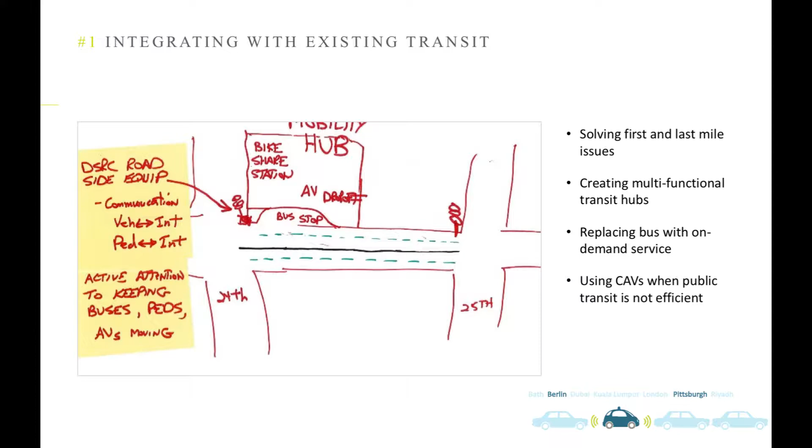And so they did see the opportunity of autonomous vehicles, and we've heard that this morning already, to have a first mile, last mile connection, but only if it is done in a way that the integration is so seamless that you're not really feeling like you're doing a change. Because if you start to feel that there is a change between getting out of your car into public transit and you have to have a new ticket or anything like that, you will feel it is an inconvenience and you stay in the car.

So it was really about how to think that, and in that context, the idea of mobility hubs came up where you could also pick up your Amazon package on the way. Why do we all think that we need to have the Amazon package delivered at home? If it's that convenient on your route to somewhere or from somewhere, it might be a much more efficient way to get you the package delivered.

And then it was recognized that CAVs, in whatever form, and I think Anthony's presentation made it very clear that there are many different forms of these vehicles, can replace public transit at times and in locations where it might not be efficient. So nighttime or in the outskirts of the cities.

The second idea that came up often was a more dynamic way of using the space, because often today the street is designated to the car, but if it doesn't have heavy tidal flow, it's still designated to the car. But does the technology of connected vehicles allow us to think that there might be times, in the afternoon where it's not really used by cars, can we then give it back to kids playing on the street? I think a lot of participants were excited about this technology and started thinking about how to dynamically allocate spaces to different users, from retail to pedestrians to different types of transit.

Then, with the hopes that governments really can regulate these things and can overcome the political hurdles, the financial hurdles, people really got excited about thinking about street hierarchies where you maybe have more vehicles, where you have less, and really started thinking about what you could do with the street. It was really bringing up the need for different types of storm management, removing the curb, using the public space and the street as a community asset.

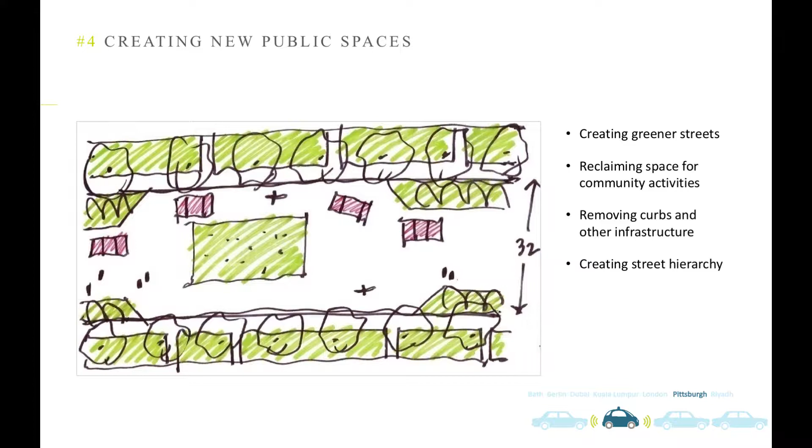And then the last two ideas are really about how to manage these changes, and two things that came up all the time were pick up and drop off. You can start seeing that with Uber and the ride services coming into our cities, there's really a need to rethink pick up and drop off. And even though we had a lot of urban designers at these workshops, I don't think anyone really came up with a solution that was satisfying to the participants.

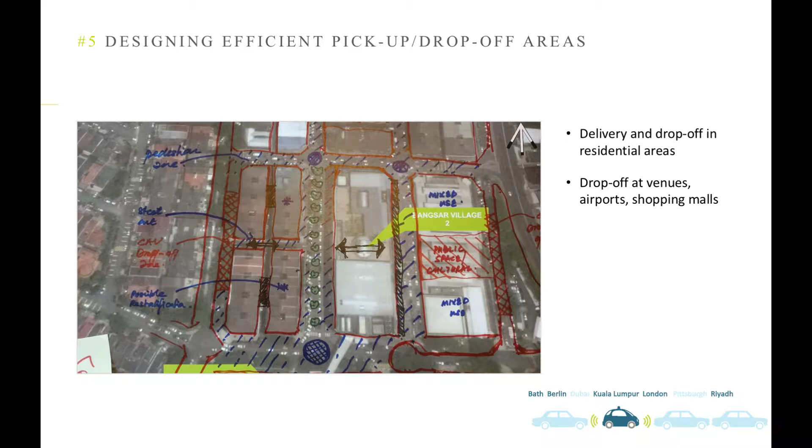So there was a lot of: instead of one lane, you have several lanes, and you have these stops, and people can come and figure out which number lane they have to get their car from. But I think there wasn't really a solution for dealing with the high capacity issue that we're expecting. And then there was also delivering your package at the home.

And as I said before, the idea came up of having a hub, potentially a neighborhood post office where you're actually going and picking it up. Canada already has that for picking up your mail; it isn't delivered to your home anymore. But also using curbside parking, maybe getting rid of curbside parking if you really don't need as much parking anymore. And then the question of parking was also heavily discussed in these workshops.

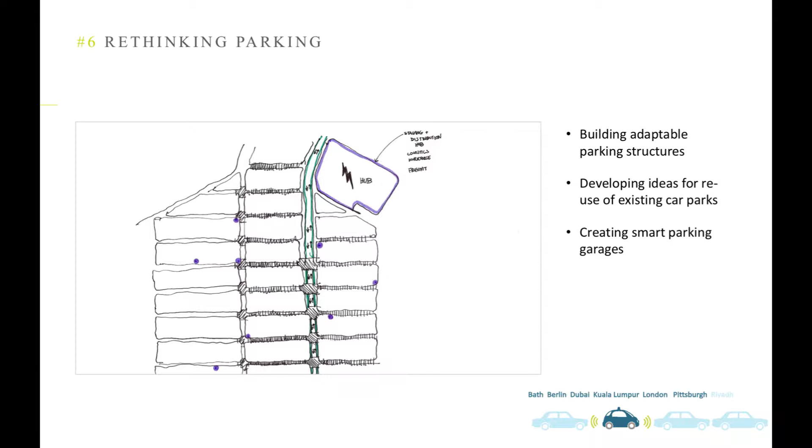From the question of, do you have the parking in the city, on high value land? You might need some parking there, because otherwise you just have vehicles coming in and out, and if they're empty, they're just going empty out of the city and parking in the outskirts. But then also rethinking parking as maintenance garages, as charging garages, and so on. And I think Anthony brought some examples this morning about how you creatively adapt parking structures in our cities.

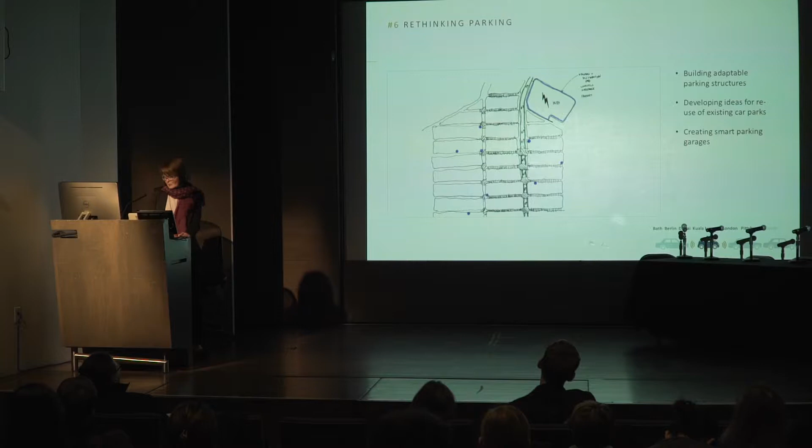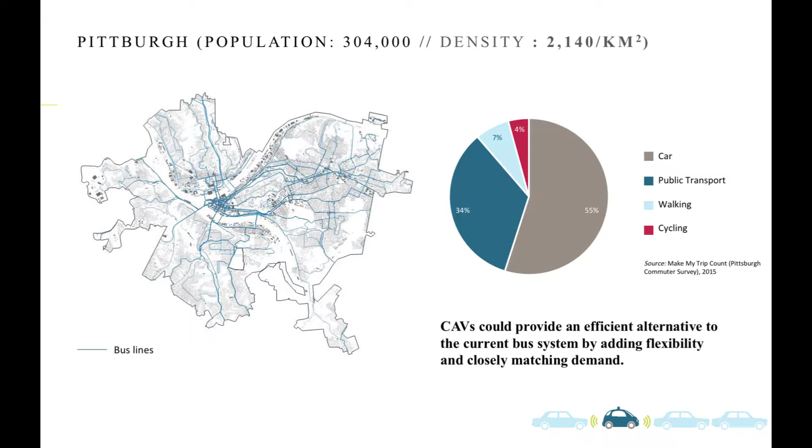So those are really the six ideas that were a recurring theme in each of the cities. But as I said before, I really think the context matters, and a city like Pittsburgh will have different opportunities and different risks with CAV technology coming into the city. It can potentially be an alternative way to provide public transport, especially if you think of the ART system that we heard about this morning, or more on-demand bus provision. And again, that's different from Berlin or London, where you have a very strong public transit system, especially in Berlin.

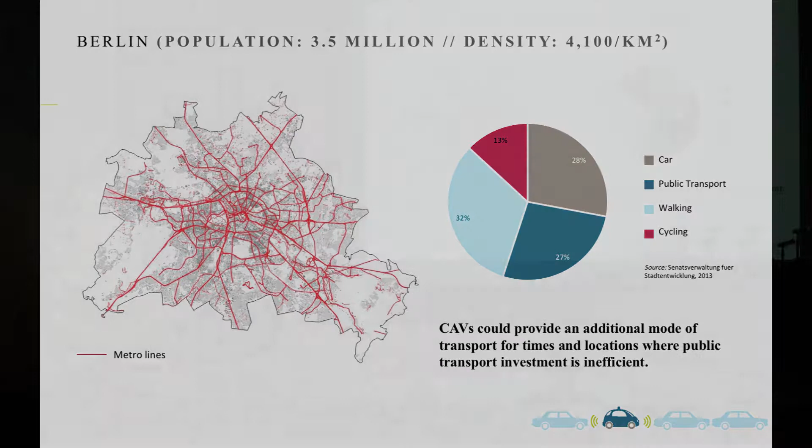Car usership is somewhat limited, and you can actually see in Berlin that the public transit agency, basically the parallel of the MTA in Berlin, is now partnering with Via, the shuttle bus that we also have here in New York, to provide first and last mile connection to their system. It's their pilot project, and they're integrating it as the public transit agency. So they're taking it into their hands because they see it as a threat to their system. That's it.

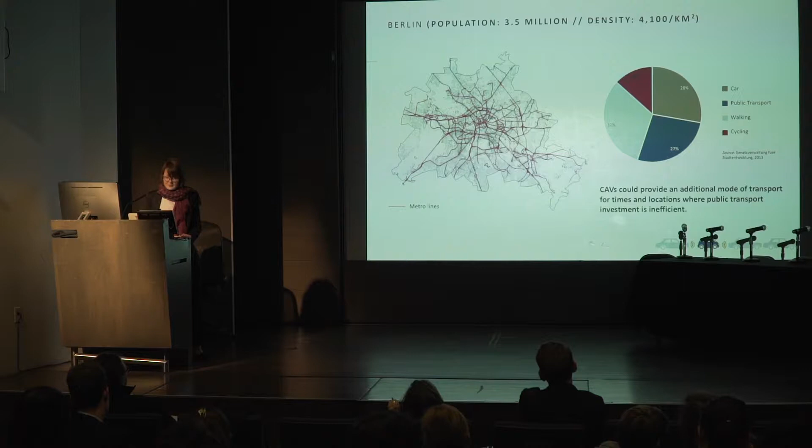My name is Schaper. I'm a design director at Gensler, and I lead our urban strategies and design practice. What I put together for today is a series of projects that we've been doing over the past 4 to 5 years. And I think, incidentally, I grouped them chronologically almost. And they reach almost across the entire transect from cities to suburbia. And they're interesting in as much as there's a lot of parallels or connections to what we heard from Gabrielle about the history of the utopia.

But also it's work that relates to not so much fueling the hype about autonomous vehicles, but think about the possibilities that the technology presents in other dimensions, especially as they are related to the public realm.

I don't know if you saw recently, just last week, there was a collection of videos on LinkedIn circulating snapshots of New York in the first decade of the 20th century. And the commentary was astounding because it was all about the walkability of New York at the time. And of course it still is, but it was about how well-dressed the people are and how active they feel and how lean and healthy they all look. And responses referred to the fact, well, we used to walk more than we do today.

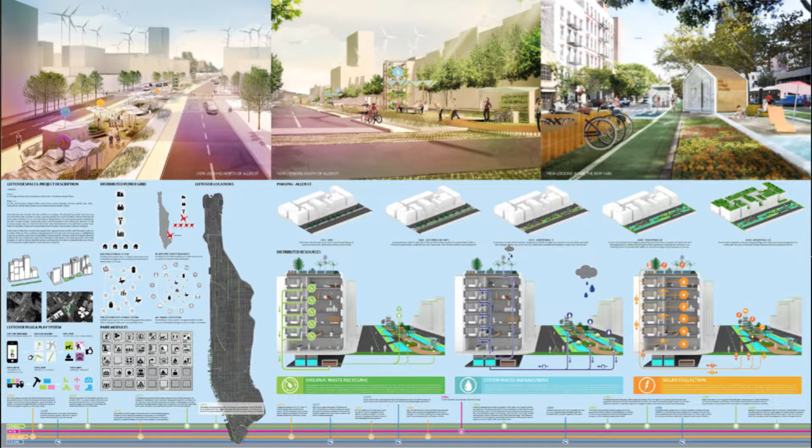But I want to start with this project, which goes back to kind of a Gensler internal initiative called Town Square, or Rethinking the Town Square. The team in New York focused on unused spaces across Manhattan on medians. Turned out there's quite a bit of area that we don't really know what to do with. They're inaccessible, unused. The core of this idea went back to saying, can we develop a kit of parts of quickly delivered elements that enable local adjacent communities to orchestrate their block parties by ordering these elements through an app and have them delivered for a weekend party.

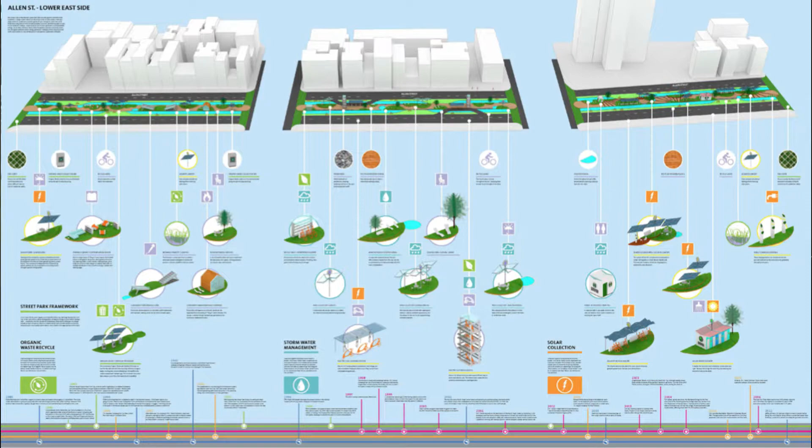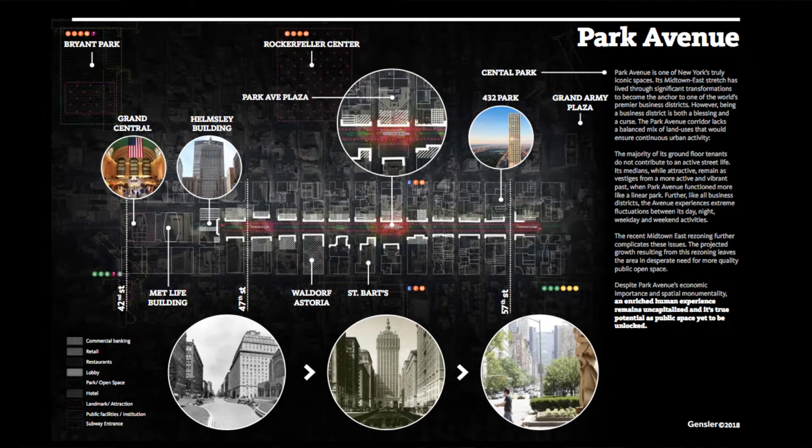Interestingly enough, this was just 4 to 5 years ago, and it was not driven by autonomous vehicles. Nobody talked about autonomous vehicles at the time. Just this year, we participated in the Beyond the Center Line competition, focused on Park Avenue, the stretch north of Grand Central, between Grand Central and 57th Street. As you see down in the picture below, Park Avenue actually used to be a park. It used to be a linear park that gave precedence to the pedestrian, and then over time transformed to the way we know it today.

Interesting thing about Park Avenue is it's one of the few pure business districts in Manhattan that are empty after hours and empty on weekends. So what we said was, can we create a different interpretation of that street corridor as a smart street corridor to adjust the section of the street to the time of the day or the time of the week. And there's a UK company, can you not see it on the bottom?

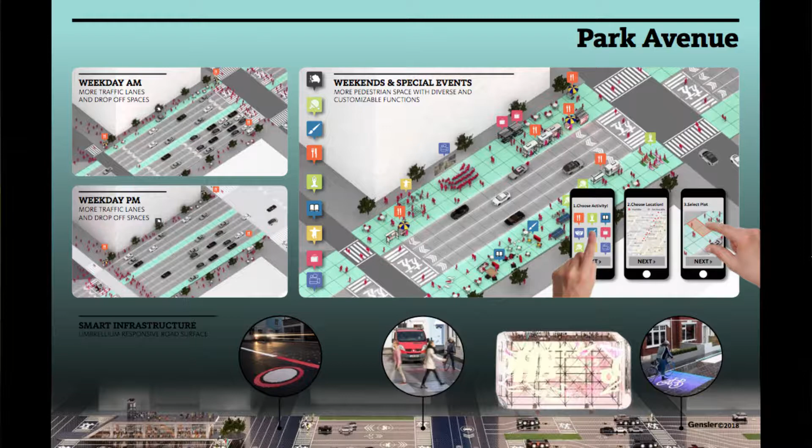There's Umbrellium that came up with these tiles that become digital surfaces designed for street surfaces that can literally create the condition for changing use, change the median to the left or the right side to give priority to northbound or southbound traffic, or on weekends take the median away and create super wide sidewalks to have similar things happening that I mentioned with the Town Square Initiative project.

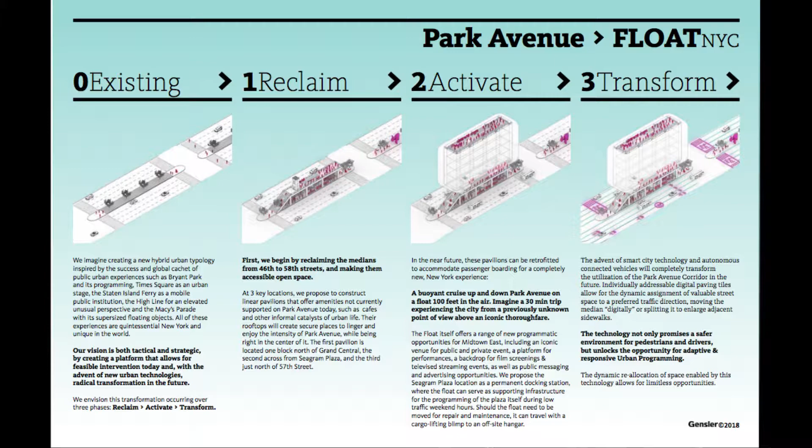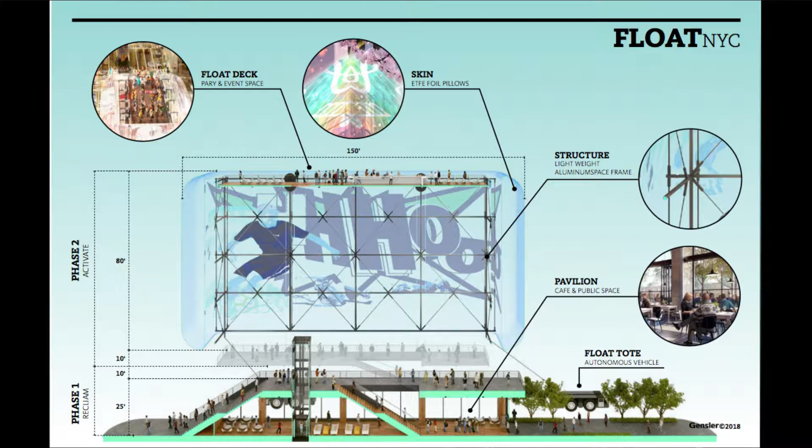But once we were there, we took it one step further to say, is there an opportunity to actually create a cruise up and down Park Avenue? And think about this as a cargo lifter, as a blimp with a transparent surface and a platform that can rise up and down, that docks in various stations. The round trip from 57th Street down to Grand Central and back is the equivalent of a rotation of the London Eye. And perhaps now that the Staten Island Ferris wheel is dead, maybe there's another opportunity to create something like this.

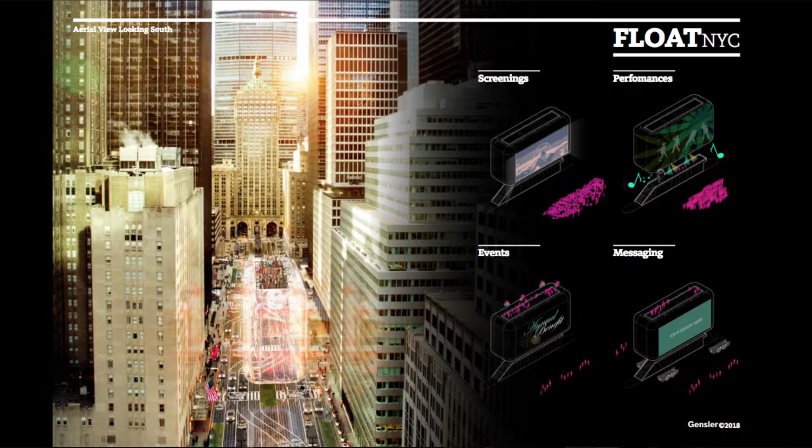But the interesting idea about this is that it activates the space in a spectacular, coincidental way that is kind of a coming together of known New York City attractions like the Staten Island Ferry and the cruise around Manhattan, all those kind of things. Of course, highly speculative, but it sort of speaks to the idea of placemaking and looking at street corridors that can be temporarily used for completely other purposes. Concerts on the weekend on Seagram Plaza, for example.

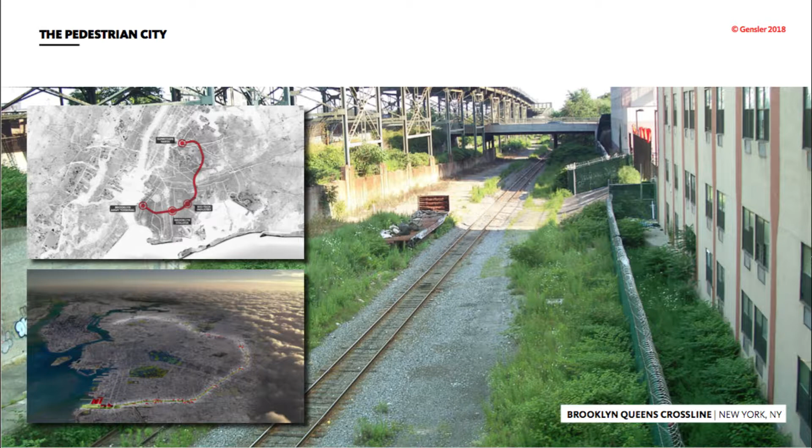Another project is our focus on the Bay Ridge branch line of Long Island Railroad. Of course, this alignment is also known as the Triboro line, and I think we'll hear later today about this, and kind of the role that this took in RPA's 4th regional plan. When we started to look at this, it was a response to a transportation initiative by the Urban Design Forum. In its initial form, we called it the bike line.

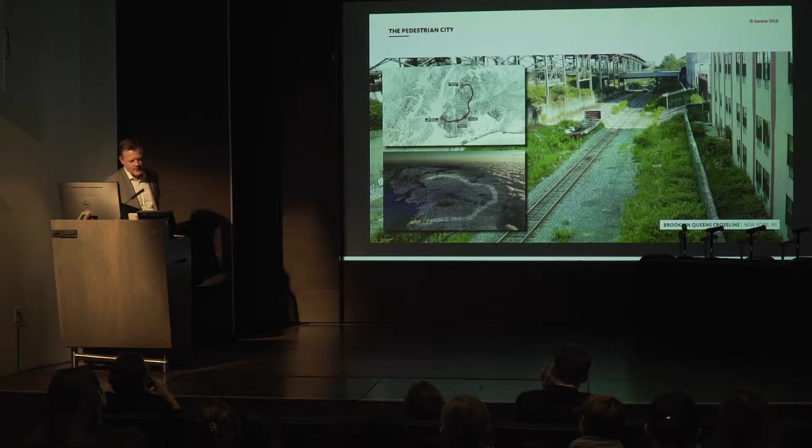Trying to find sort of off-the-street-grid alignments to create super bike highways in the outer boroughs, and at the same time find a reason to open up the space to the public, which is actually quite a beautiful linear park. Of course, it's an active freight line. Of course, there is freight rail happening today and increasingly in the future, but we saw a possibility of coordinating multiple modes of transportation within that corridor.

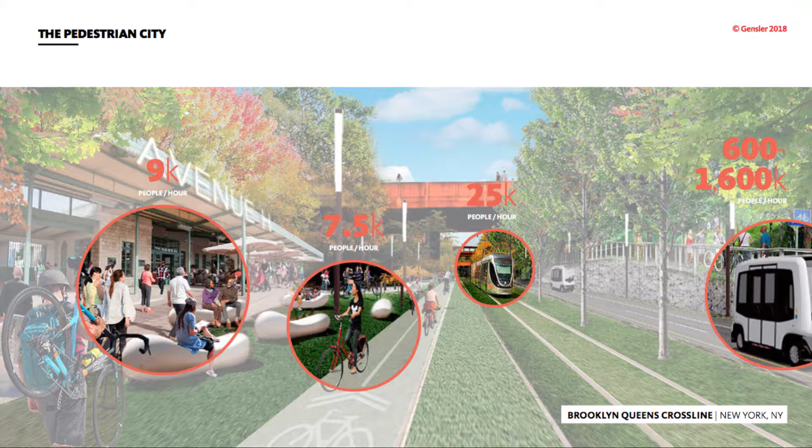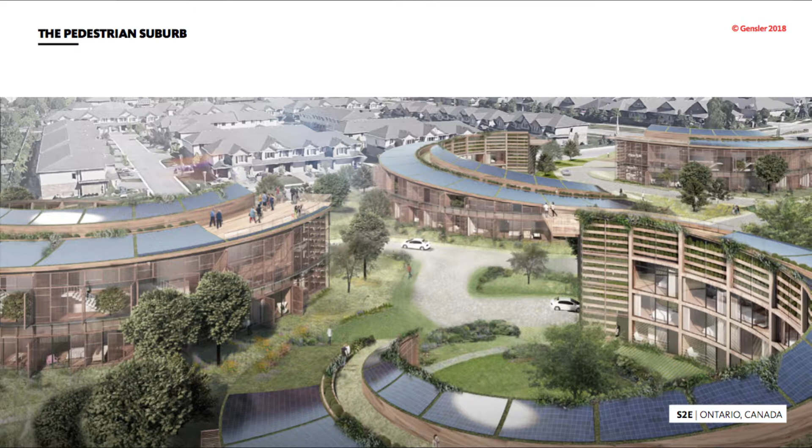And then moving into a suburban example, this is a development that we did a concept design for earlier this year, and we're embarking now into design development and construction documents for a townhouse development in Ontario called EVE Park, EVE being the acronym for Electric Vehicle Enclave. And it was the opportunity to completely rethink the paradigm of the suburban street the way we saw it in the introductory lecture, Radburn being kind of that interesting hybrid between preference to pedestrians on one side and cars to the other side.

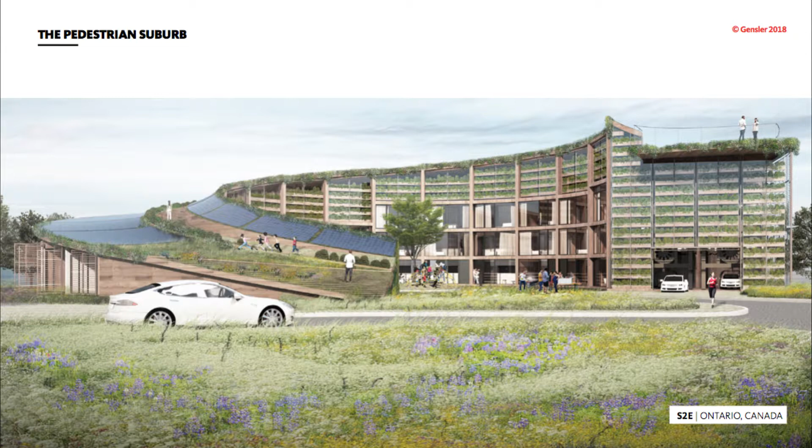Here, these circular buildings have a half-open courtyard. Vehicles actually self-park in one end of this, but these vehicles give priority to pedestrians. They stop when someone crosses the street, and you start living in a park. And of course, organizing the townhouses by size allows us to bring the buildings down to the ground and avoid the kind of adjacencies that you have in a traditional suburban paradigm where you have just buildings facing each other, to more play with the idea of an active landscape.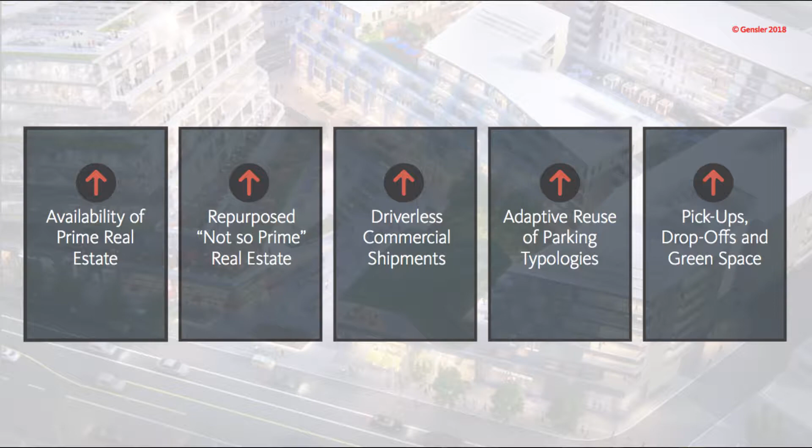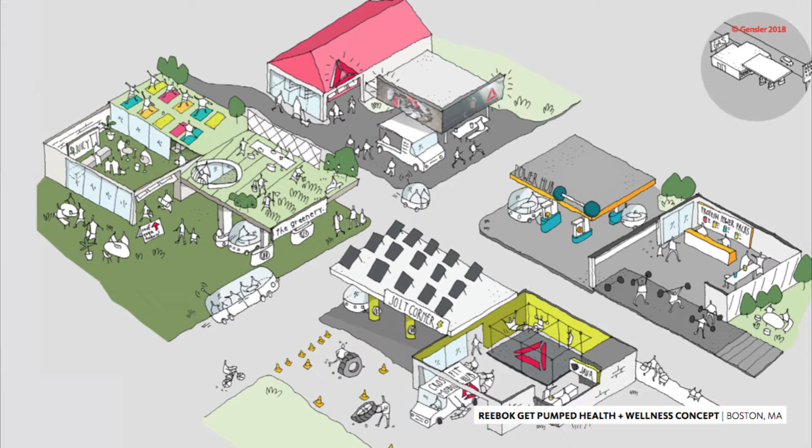And then just a few examples where this idea of the possibilities of the technology also plays into threshold spaces and also into buildings that we've been seeing. The infrastructure built for the car may be largely obsolete. One of the things that we started doing, a collaboration with Reebok, Get Pumped, is turning gas stations in the future into workout opportunities and healthy living spots.

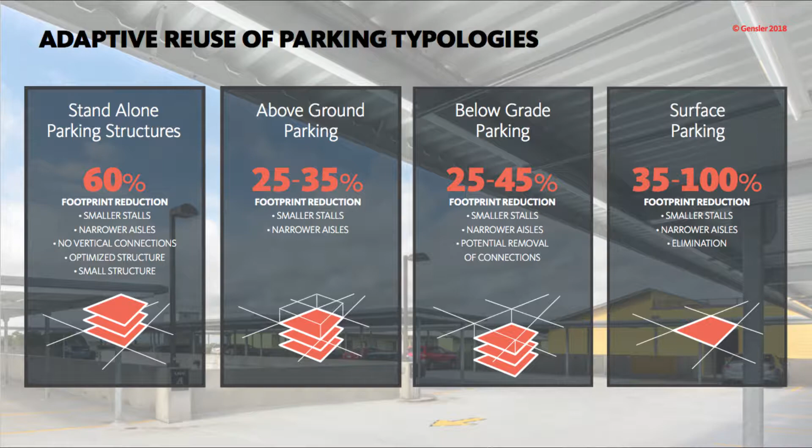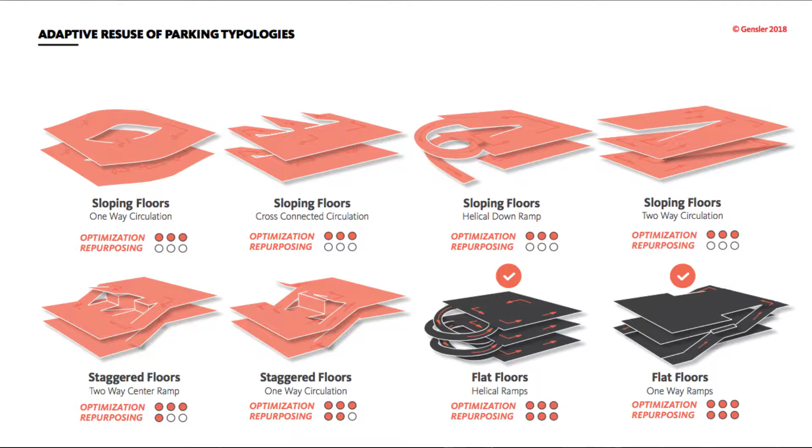And then, of course, the impact on traditional parking garages, meaning the organization of the conventional parking garage for autonomous vehicles will allow us to reduce the amount of space, but also if we design it right, and the lower right corners are the recommendations for that, flat floor plates rather than slanted floor plates. In theory, this allows buildings that have office on the top, parking in the middle, retail on the ground floor, with the opportunity to grow the office space down into the parking when the parking demand is reduced in the future.

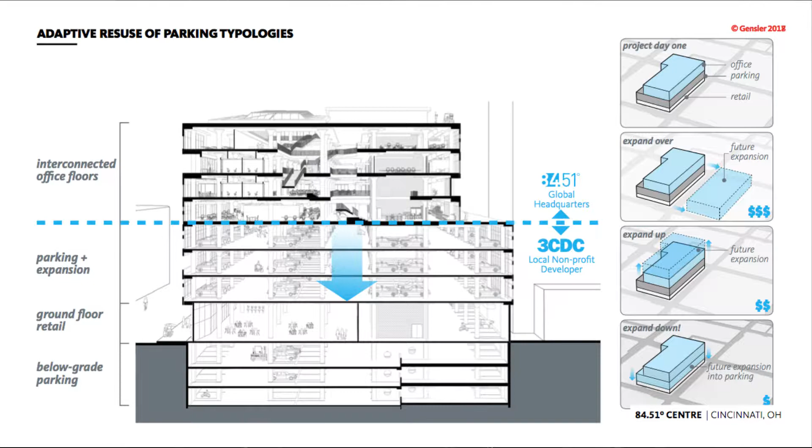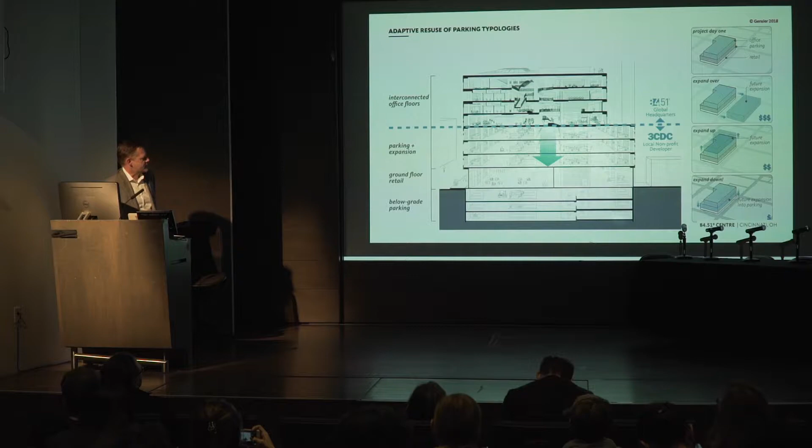This is an actual project. Our client basically said it pencils out for us to do this because, expecting to grow significantly in the future, a future expansion on a neighboring lot or vertically would turn out to be more expensive than within the building. The other interesting aspect of this project is that the management of the parking space, as long as it exists, is by a non-profit developer. And it's a model that works, and we built the project. What you see here is that the facade actually covers the entire building, not just the office floors.

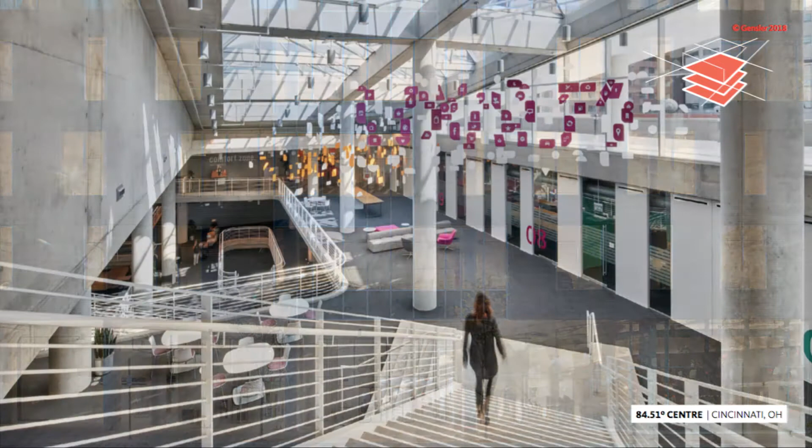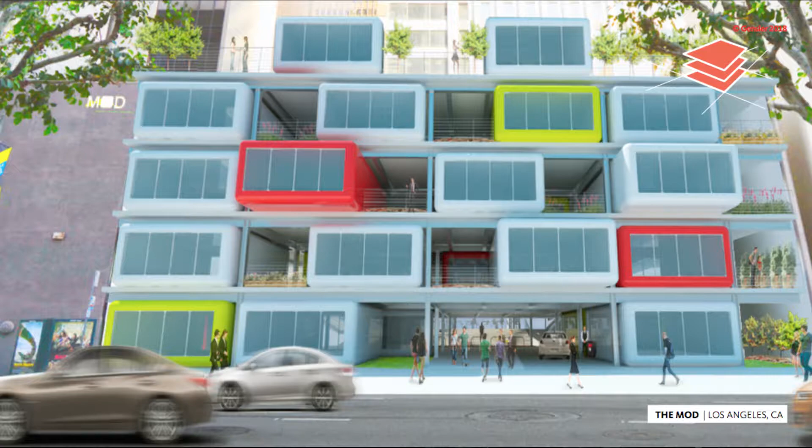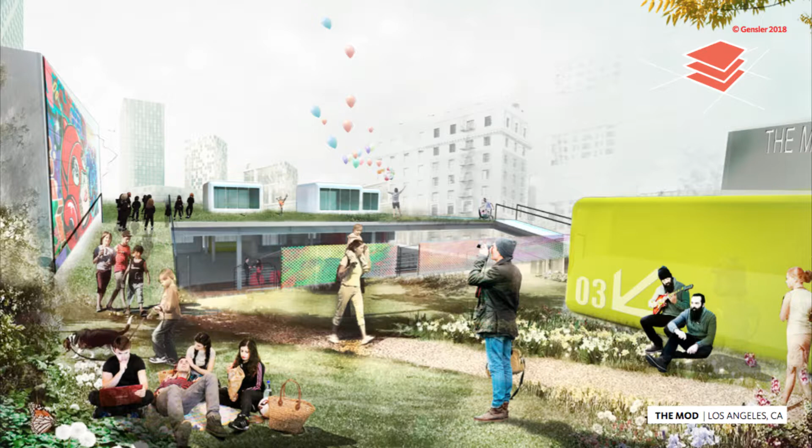Ground floor retail and then 3 floors of parking that are built as if you would move into a warehouse that was built for a different purpose. And then the Mod in Los Angeles is another example, which is more like a 1960s idea, of course, of creating ready-made modules to slide them into a parking garage, but mentioned here because of the opportunity to extend public space into a hyper-park situation, into sort of urban oasis, playing to the idea that parking garages are in fact applicable to future different uses.

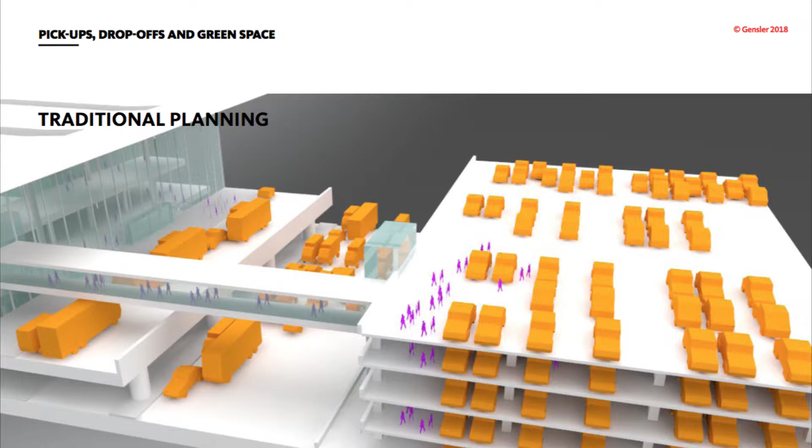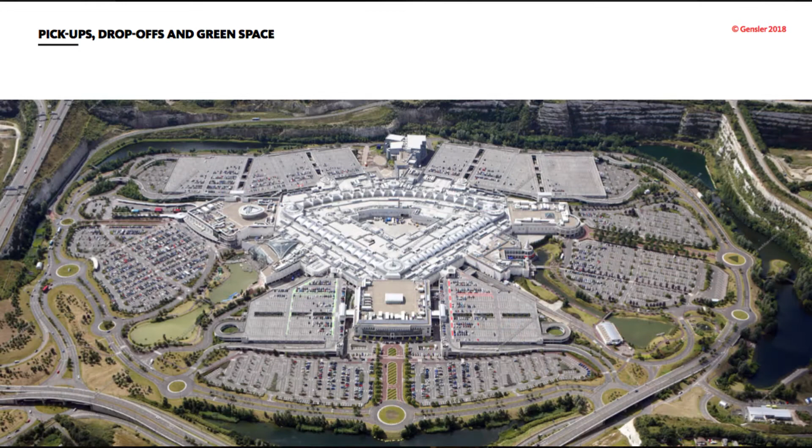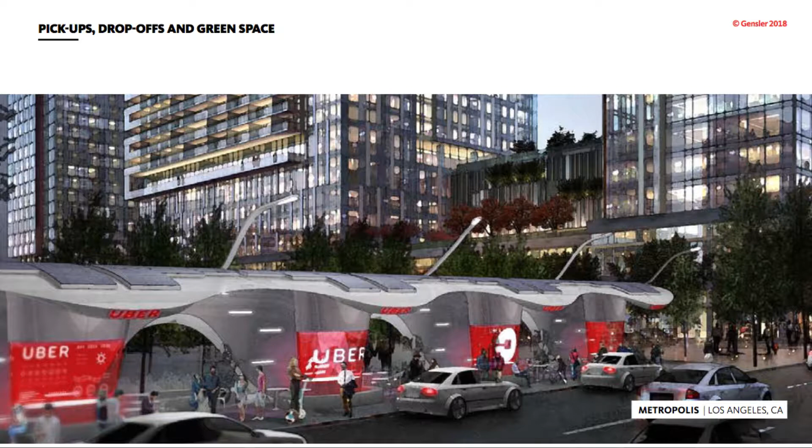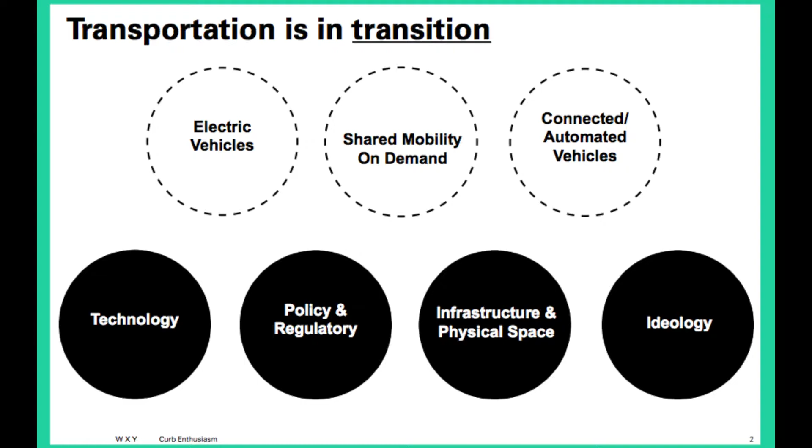So as we've been talking about today, especially in the first half of the day, transportation is in transition. What we know is that transportation sectors are responsible for 30% of the greenhouse gas emissions in New York City, and over 90% of those greenhouse gas emissions are directly related to on-street transportation and primarily personal automobiles. And so that's what I'm going to focus on today, the transition to electric vehicles as a great opportunity in New York City. And I'm going to investigate a little bit by presenting one project that we've been working on to understand what that means for how we organize our city streets.

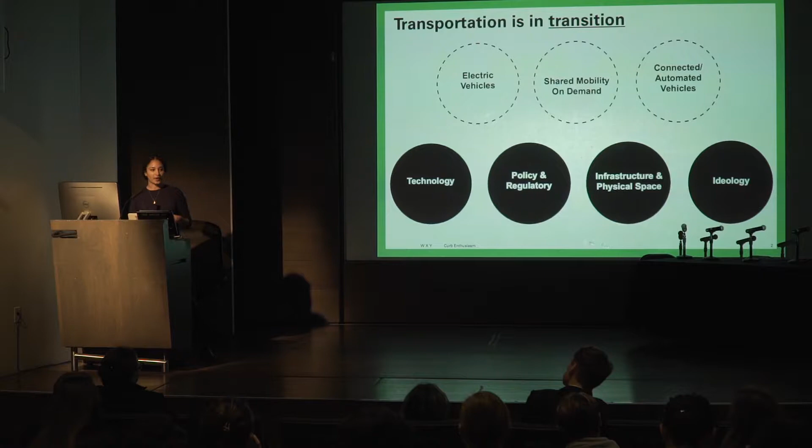So annual EV sales and registrations have been increasing nationwide, but also in New York City. There has been 168% growth in passenger EVs year over year for the past 4 years in New York City. There's over 30 electric vehicle and plug-in hybrid electric vehicle models in New York City. There are state and federal rebates that are increasingly making electric vehicles a smart choice and an economic choice for average consumers, whereas previously they were cost prohibitive. So all trends are pointing towards an increase in electrification across New York City and also in New York State.

But still, there's a critical barrier to the successful large-scale adoption of electric vehicles in New York City in particular, and metropolitan areas that are similar in profile to New York City. And that's largely due to an issue of space and the fact that there's no public access electric vehicle charging stations. That presents a perceptual barrier for consumers to make the shift to electric vehicles. If they don't see the infrastructure, then they might be afraid that they won't be able to complete their trip on a charge. And in New York City, where most people park their vehicles on street rather than in garages or parking lots, it's a logistical barrier. If you live in a multifamily apartment building, or if you live in a brownstone, you don't have access to private parking spots, so how would you charge your vehicle?

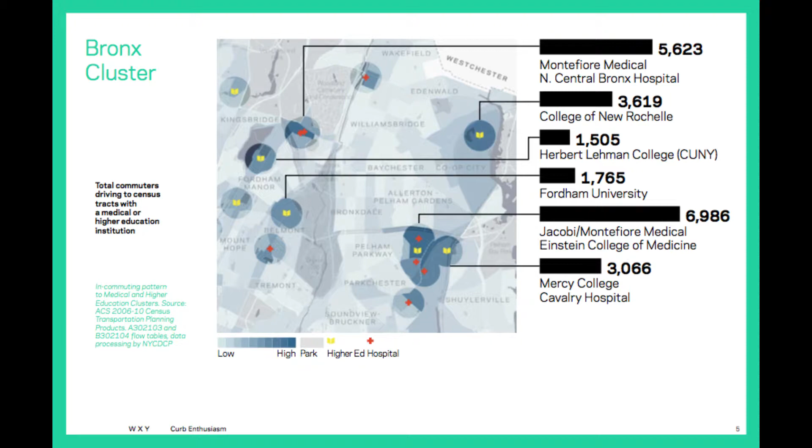And we came up with 6 planning principles that we tried to abide by in the planning framework practice. One, to support multiple user groups and use cases, so to think through a 24-hour day, who are the users going to be? Is it a resident charging overnight? Is it a commuter? Is it a visitor to a store?

Replace internal combustion vehicle miles traveled with zero-emission vehicle miles traveled. This is really the tricky part. And the map that we show here is one of the strategies that we developed to address that. And by targeting existing drivers, car-dependent commuters who rely on their vehicle because they don't live in proximity to public transportation or because they work second and third shift hours where public transportation is not readily available.

We're hoping to target those neighborhoods where they drive to the clusters of hospitals and university institutions where they work that are also nestled within medium-density residential neighborhoods, so that you can kind of hit 2 birds with 1 stone, catch the commuters and the residents for charging.

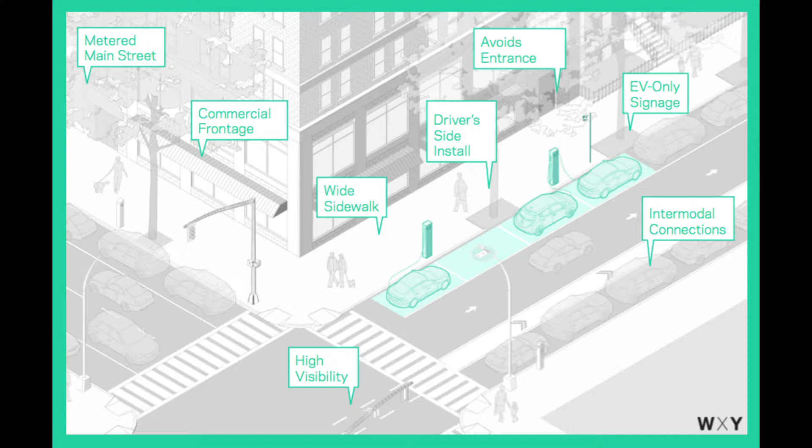And then we got a little bit closer, so we started at the city scale and the regional scale thinking about the framework, and then we start to get down to the neighborhood level and the street level and wanted to identify which street types in New York City can actually support this type of new infrastructure.

We arrived at 4 opportunities, street types, local streets that might primarily service multifamily residential neighborhoods, have lower volume of traffic. Spur streets that you're seeing here, that typically a local street won't have any paid metering, but oftentimes the New York City Department of Transportation will have a commercial main street metered, and then the intersecting local street will have metering 3 or 4 spaces in, or the length of the building's frontage.

And by taking strategies where there's existing regulation and placing charging stations on those street types, it helps to reinforce charging station turnover, and it also builds in a good opportunity for multiple users. So you could imagine in this situation, maybe in the daytime, it would be short trips, visitors to the commercial frontage on the neighborhood main street, and then in the evening, when you're not restricted by a 2 or 4 or 6-hour meter, then it could turn over to residential charging.

So I'm going to go quickly through some of our other slides. We thought a lot about how you fit a new street furniture element into all of the other things that are already on the sidewalk and the curb. And so you have to compete with existing street furniture elements, tree pits, building entrances and exits, pedestrians.

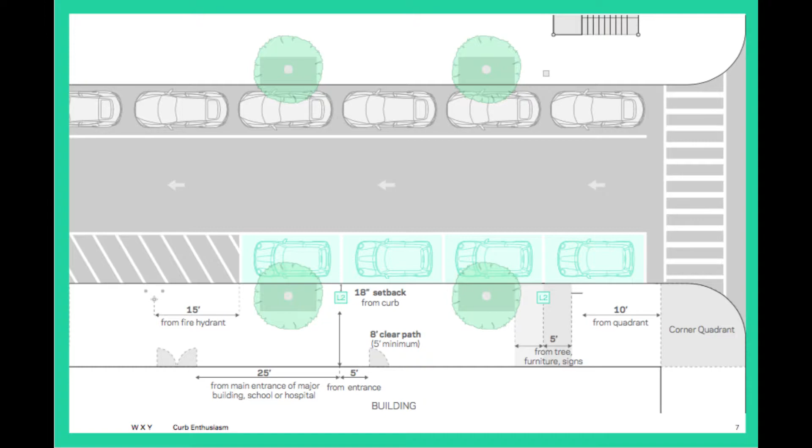And so very quickly, the last thing that I want to go through is a collective that I co-founded with a group of other Black and brown urban planners, architects, urbanists, and designers in New York City. And the reason why I want to talk about this is because representation matters. And it's especially important when we're talking about the history of transportation interventions and how those new interventions and new technologies have affected communities of color and Black and brown communities in particular.

And so we're working together to make sure that Black and brown planners are represented and that the folks that are making decisions, policymakers, architects, designers, are reflective of the communities that they're planning for.

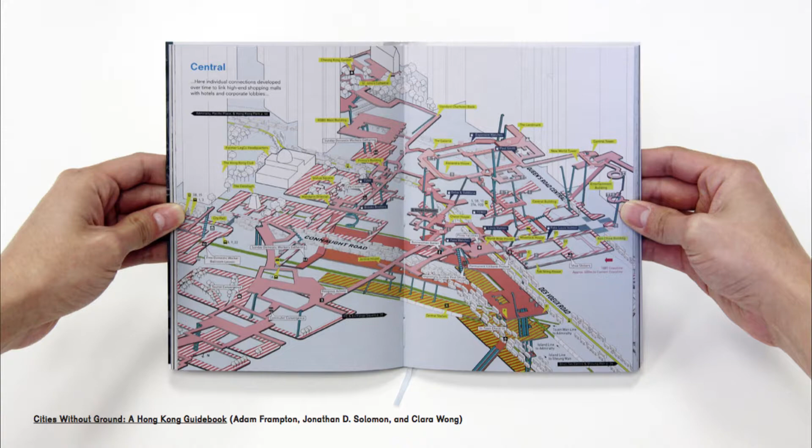And so the book consists of 32 maps showing a kind of three-dimensional Nolli plan of the layered public space, publicly accessible space, including subway platforms and pedestrian overpasses and underpasses and shopping mall atriums and hotel lobbies.

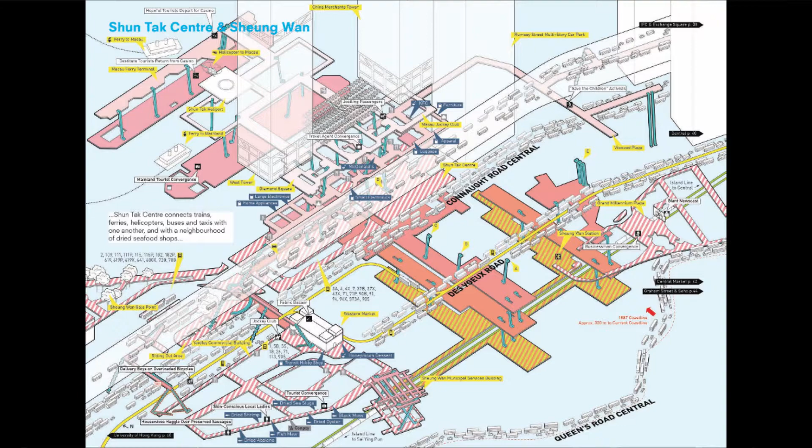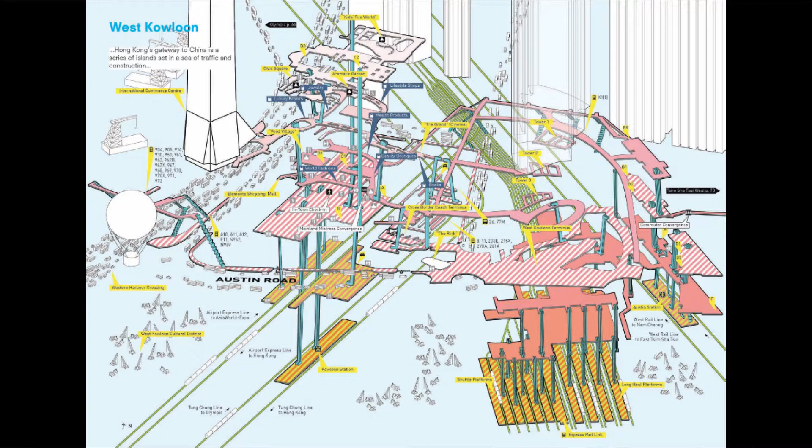And so just to briefly take you through some of the maps, this is Shun Tak Center, which functions as a kind of intermodal switch between tram, subway, bus, ferry, helicopter, taxi, etc. This is West Kowloon, including the XRL high-speed train station to Beijing that was under construction at the time that we drew the map. And each of the parts of the system, these networks take on very different types and forms, including the verticality of the Kowloon Tong shopping mall here.

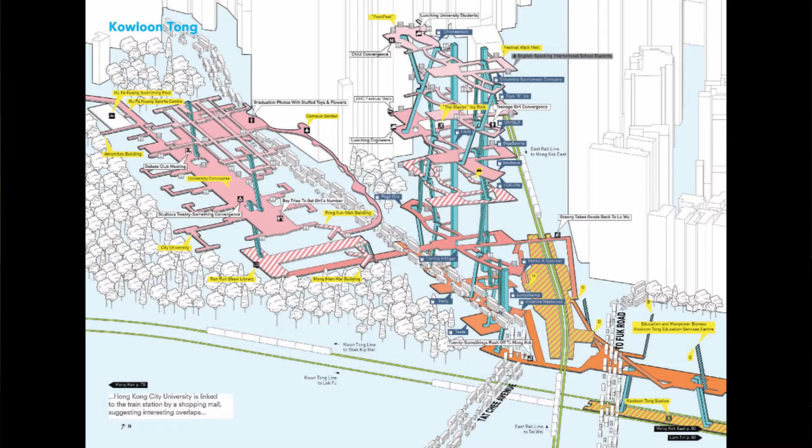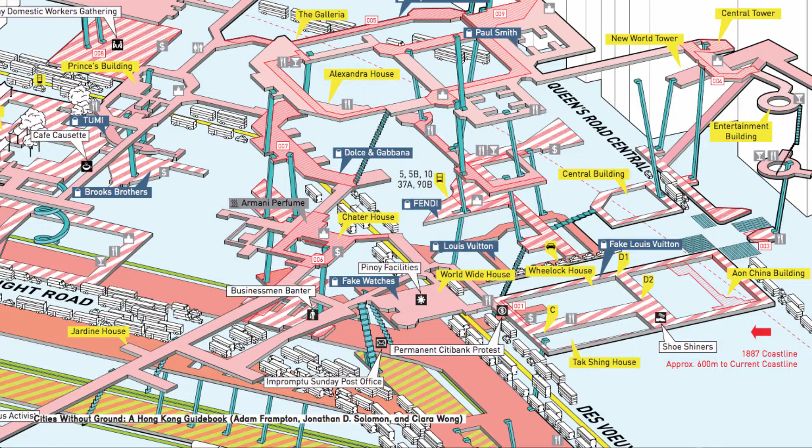And so looking at a detail, one sees the layers, but also the contradictions of the system. The labels point to these activities and events, and the circulation networks that really make Hong Kong's public transportation work. And so although a significant portion of it is privately owned, we consider it public space. What we heard at the time is that Hong Kong has no public space. But I think here it happens, and it doesn't maybe necessarily resemble what we think of as public space, but it functions as such.

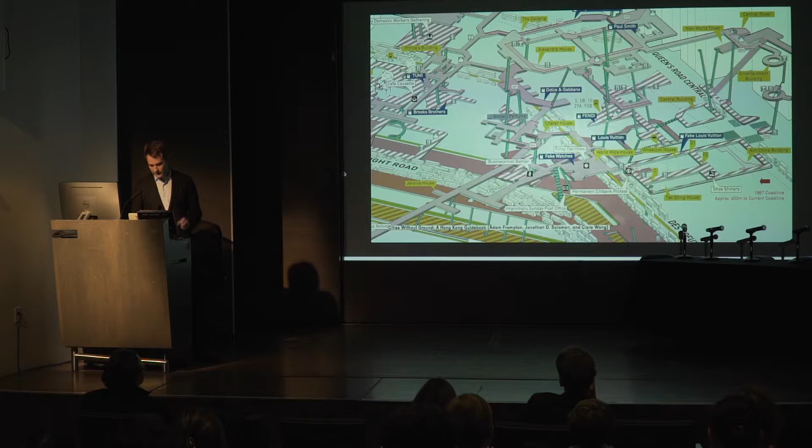So I think Hong Kong could be a model of a city that sustains new ways of moving. So coming back to New York, last year we had the opportunity to work with the Regional Plan Association. We were one of 4 teams. Our team, together with One Architecture, a Dutch urban design and resiliency consultancy, was focused on the tri-borough. So this is a portion that Oliver was speaking to earlier.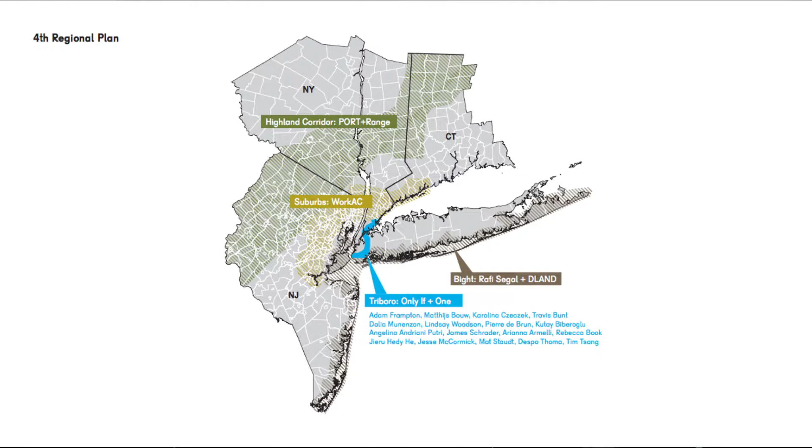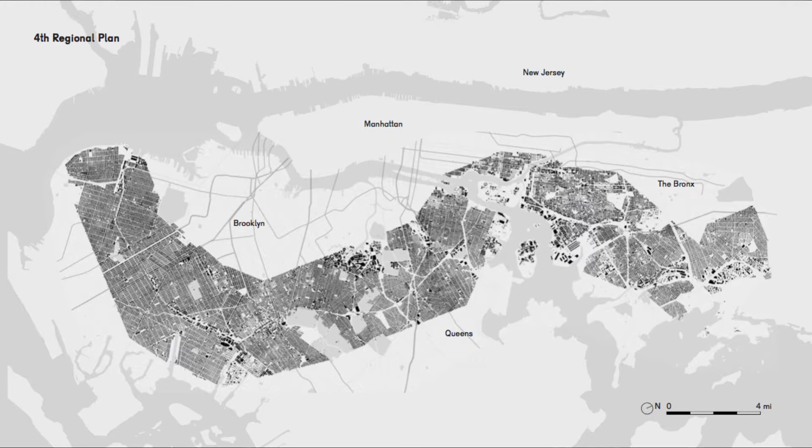And I think many of you in this room may know about its important role in the growth of the region in the future, increasingly given the unaffordability of the center in Manhattan. And I was really interested to hear this morning from Jennifer that actually 80% of the transportation-related emissions are coming from the outer boroughs. And so I think you saw under the previous administration that a lot of the innovations in transportation, like Citi Bikes, the High Line, were focused on Manhattan. So the idea here is to look to the outside.

And of course, the Triboro is an idea that's been around before us. It was a given. Its shape is related to this series of underutilized existing freight tracks. And this was the given. So they're owned by different entities.

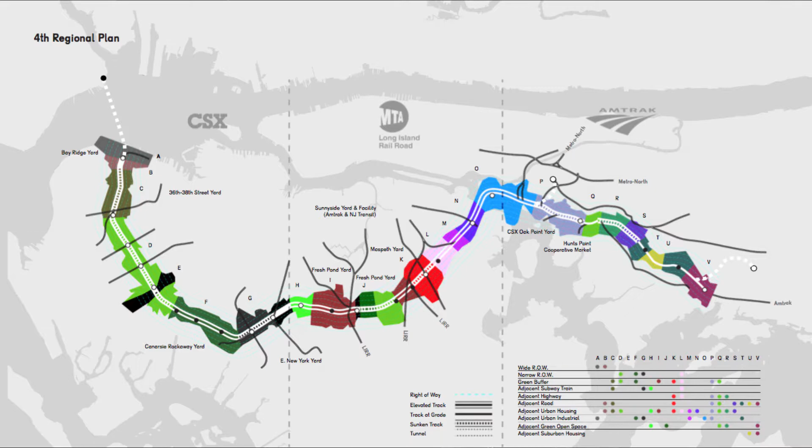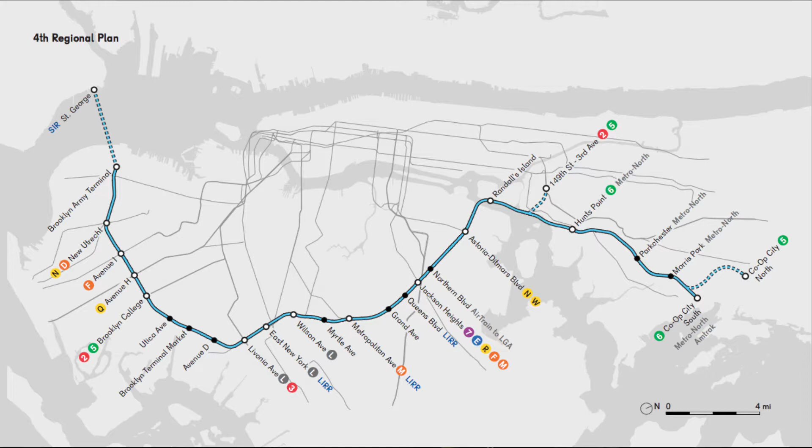And so the Triboro, our proposal is to dual purpose the existing freight and intercity lines to connect Brooklyn, Queens, and the Bronx. And I think more importantly, what it does is turn New York City from a hub and spoke system into one that has this radial connection, a circumferential spatial relationship between areas that were previously very hard to get to, and for which Uber and these other ride-sharing technologies have been filling the gaps lately.

So, one could envision that, for instance, during the upcoming L shutdown, the Triboro produces resiliency in the system to allow traffic to redirect and move around when one part fails. So more than just transportation, we wanted to think about, number one, how this would happen, and then number two, what it would do.

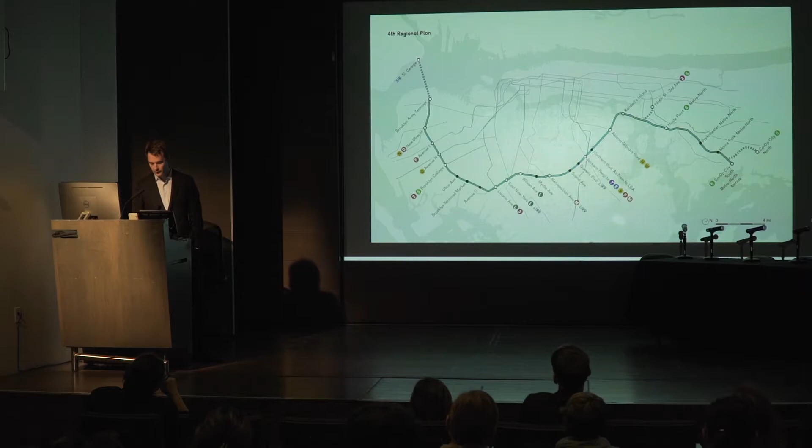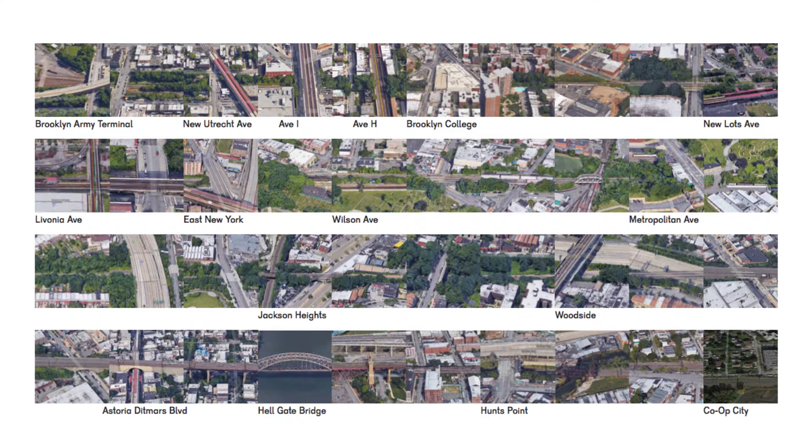And so we looked at the existing condition, which is in fact a kind of exquisite corpse that cuts through every imaginable condition in New York City. Sunken, elevated, at grade, et cetera. And the Triboro, of course, is not just a physical transect, but it's also many different diverse communities and social

and economic demographics. And so the question becomes, who participates in and profits from the improved connectivity, the increased livability, and the new development opportunities, and how can we avoid or mitigate the negative impacts of this new transportation system and keep some of these existing and diverse communities intact.

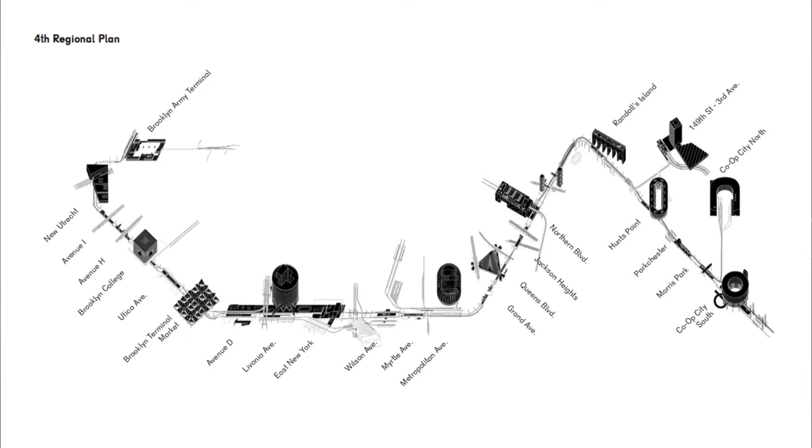And so our project consists of three different layers to describe how it would happen. I'll focus on one, but to summarize, we saw it partially as a public project, another part as a public-private project, and then there's also the private project. This is the public-private layer, which is actually 25 new stations that provide intermodal connections between the new passenger service with subway, train, bicycles, and other current and future forms of mobility. And so we created a drawing of the entire thing.

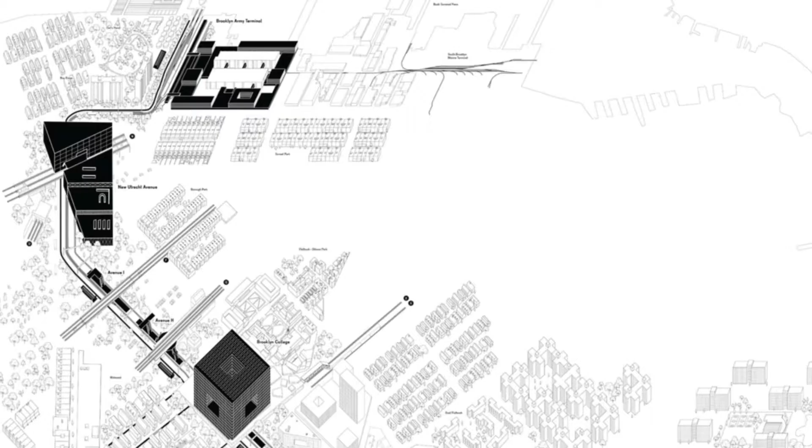And just to take you through it from left to right from Brooklyn, you see some of the stations, starting with the Brooklyn Army Terminal, are more complex. These are the nodes where the infrastructure would require resolution between many layers and therefore require more significant investment. And then other stations are much more simple, as you see here, like Avenue I, Avenue H, which are really just outdoor platforms.

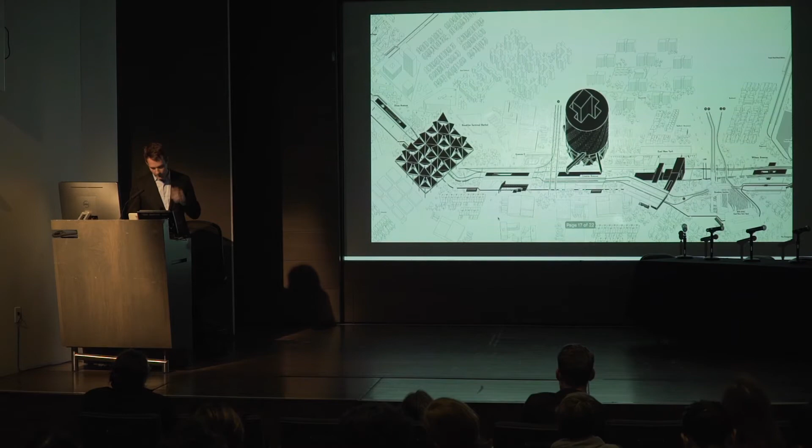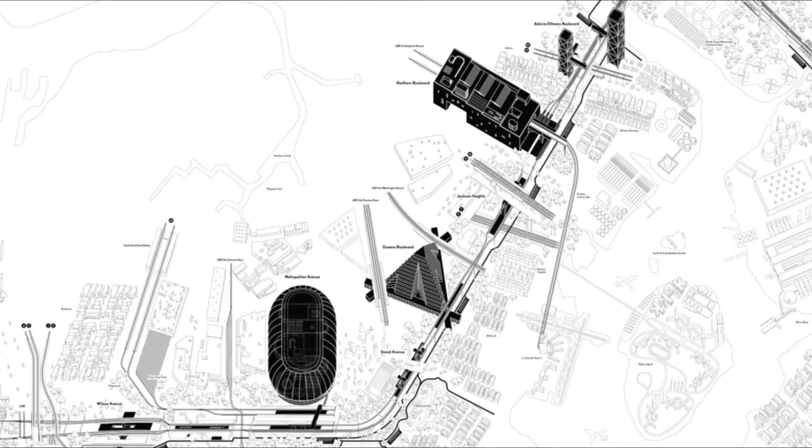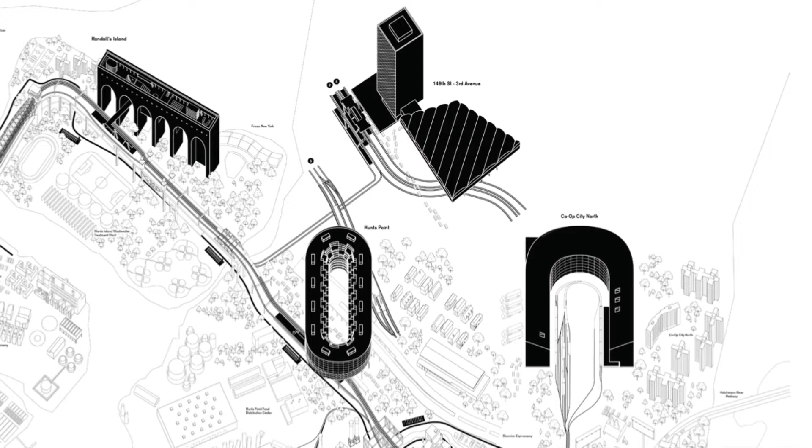The more complex infrastructural nodes all take on different kinds of programs. I won't describe all of them, but the idea was that they would catalyze certain economic sectors. They would be combined with spot upzoning. And they would create new relationships and proximities between the workforce and workplaces. And our focus was on the economic sectors that are not centered in Manhattan, like education, healthcare, manufacturing, logistics, and food.

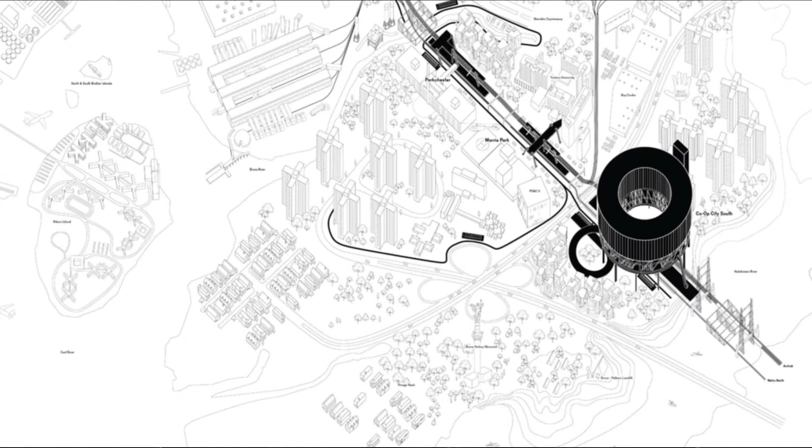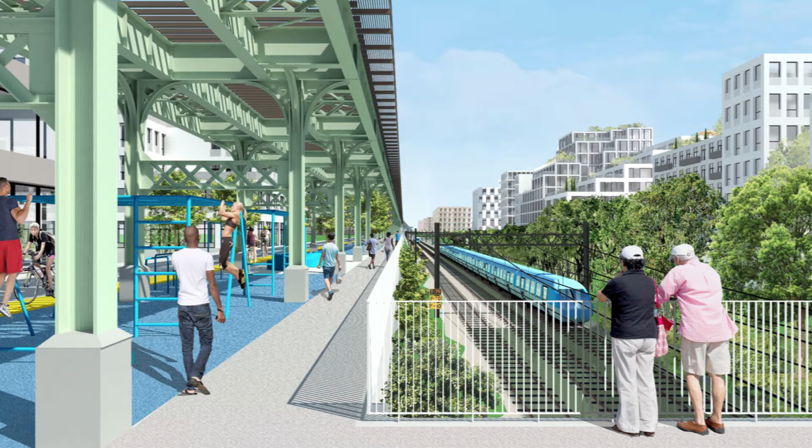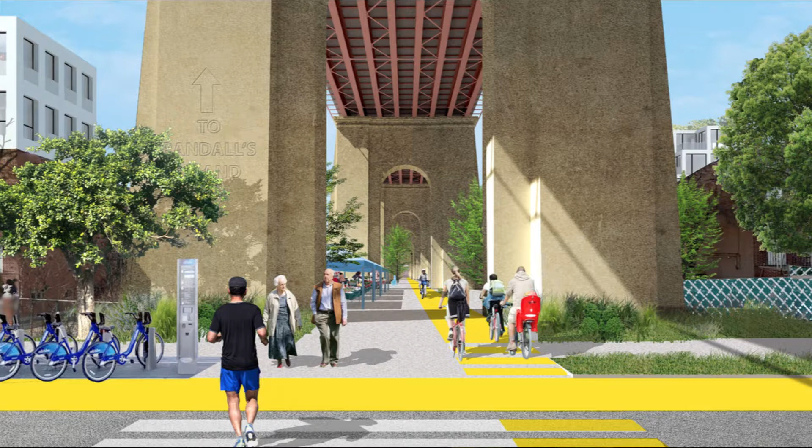And so we studied these nodes, but also the in-between spaces. This is another layer of the project, the public project, which creates a 24-mile long linear park using, in most cases, the existing right-of-way. And so it would become a park, recreational area, et cetera. In other moments, where the train track is elevated in Astoria approaching the Hell Gate Bridge, we use the underside of the arched elevated structure to create new forms of public space. And that's it. Thank you.

We'd love to hear from you, so think about your questions. So we have the title here, the architectural response. Maybe I could start by asking a question to Gabrielle, and then give you guys a chance to collect.

It was amazing to hear this whistle-stop tour through these various kinds of projects. And what struck me each time was the ideological resolve around the righteousness of each project, the belief about each one. There was an understanding of the issue, but then also a commitment to each project.

So I guess I'm wondering, if part of the idea is that we learn from these projects in the past, what do we learn from that in our own current moment around the enthusiasm-skepticism spectrum about these large projects? To what extent can we take something from that historical imagination of each of these projects?